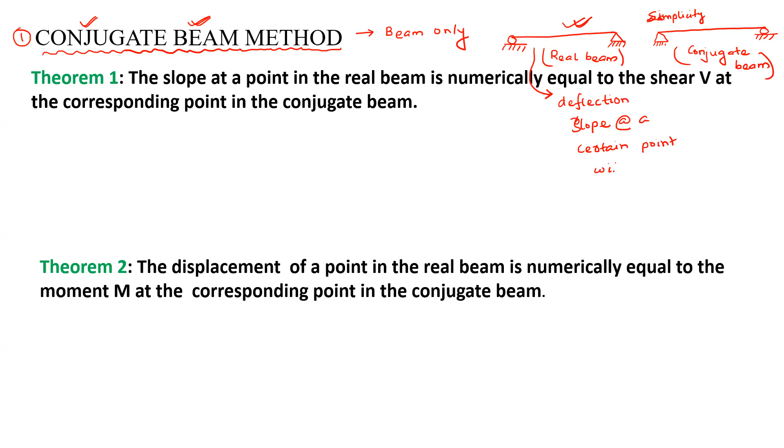Now, in this method, the main question will be like this: we need to find either deflection or rotation, which is also called slope, at a certain point within the span.

So we will make a conjugate beam. There, this slope and deflection can be correlated with some other parameters which are called kinematic parameters. When you find all these parameters, this indirectly will give the deflection and slope for the real beam.

So for this, we have two theorems: one to determine slope, and another to determine deflection. The first theorem states that the slope at a point in the real beam is numerically equal to the shear force at the corresponding point in the conjugate beam.

Like we know dV by dx equals W. We also know d theta by dx equals M by EI. So when you integrate once, it gives shear force equal to the integration of W dx, and theta is given by the integration of M by EI dx.

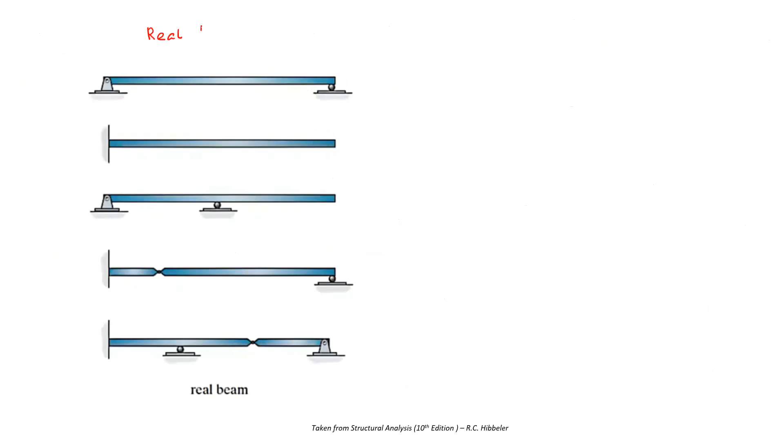Now, these are some of the real beams. Now let us draw the conjugate part of those beams.

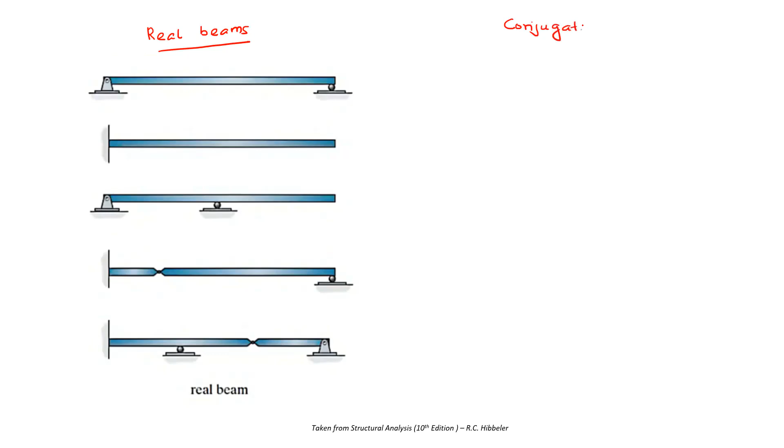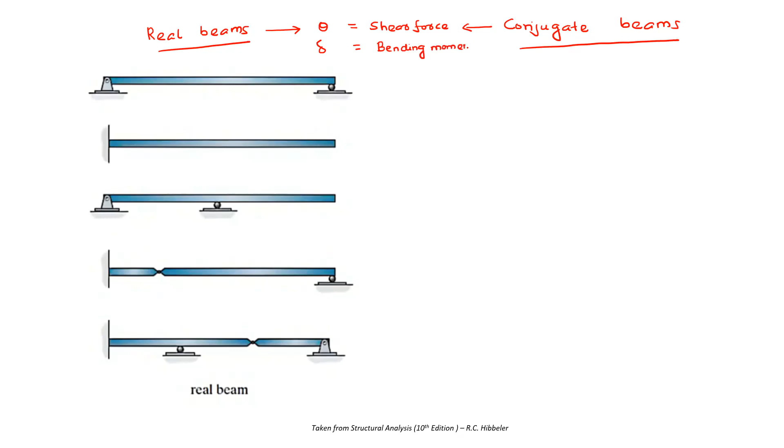Now, in the previous slide, we got that slope and deflection of the real beam will be equal to the shear force and bending moment of the conjugate beam.

So these are all real beams. Now, when this is a hinge support, what will be theta and what will be delta?

Here delta will be equal to 0, and theta we don't know the value, but it won't be 0, because when loads are applied, if the loads are applied downward only, I am assuming, the deflected shape will be like this. This point is neither moving in the horizontal direction nor in the vertical direction, and that's the property of a hinge.

But here you will find there is some slope, so theta is not equal to 0, but displacement or deflection at this point, delta, equals 0. Similarly, for a roller also theta won't be equal to 0, as you can see here. There is some slope, and delta equals 0 because there won't be any translation.

Now, when we draw the conjugate beam, we have stated that theta of the real beam will be equal to the shear force of the conjugate beam at that point.

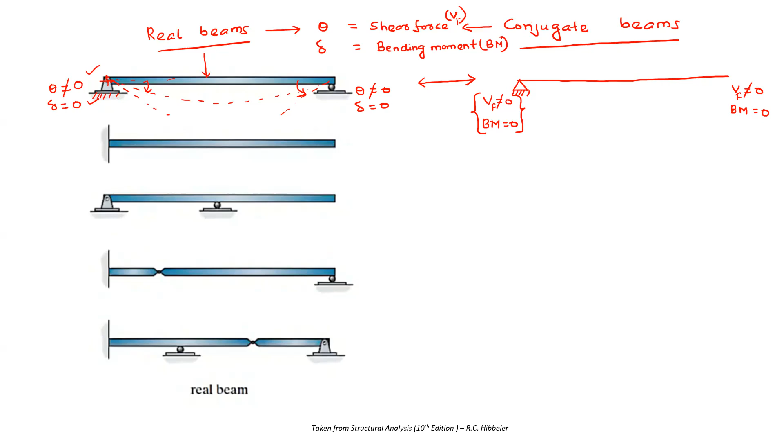But at a hinge, will it carry any bending moment, or is it free to rotate? It is obviously free to rotate, so bending moment will be 0. So from these two conditions, they are satisfied when we consider it a hinge.

Now come to this part. The same two conditions need to be fulfilled, and this can be done with either a hinge or a roller.

Now come to this cantilever beam. Now see here, theta will be equal to 0, because when loads are coming, the deflected shape will be something like this.

So theta is also 0, delta is also 0. But here, when you see, there will be some slope, so here theta won't be 0, delta won't be 0.

So for this, we have to determine supports at these two conditions such that here shear force becomes 0 and bending moment becomes 0, and here shear force and bending moment should not be equal to 0.

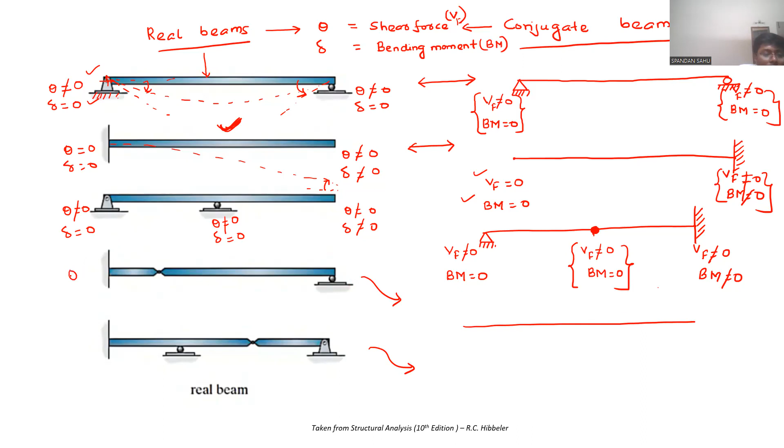Let us first draw for fourth and then fifth. Fourth, here now see, here theta will be 0, delta will be 0. So you can make it free. Here it is internal hinge, so you can make it as roller, which is internal roller. Here it is roller only, so let it be roller. So this is the conjugate beam for this structure.

Now come to this last one. Fixed will become free, and internal roller will become internal hinge, and internal hinge will become internal roller, and this hinge will remain as it is. So is this clear to all of you?

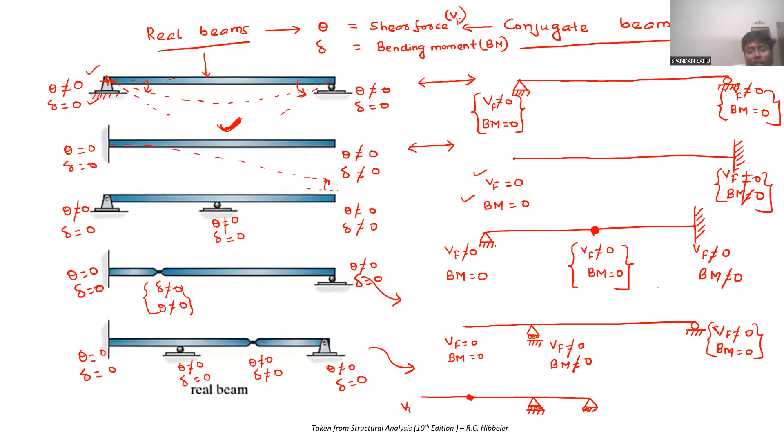Come to this, let us check the consistency. Here shear force and bending moment, 0 sir. So are they consistent now from here and here? Yes, sir. Come to this point. What about shear force and bending moment? Tell me quickly. Shear force is not equal to 0, bending moment equal to 0. Here, shear force is not equal to 0, bending moment equal to 0. How come it become equal to 0? Not equal to 0, sir.

Internal, it is internal roller. Internal, yeah. Now here, shear force is not equal to 0, bending moment equal to 0. Yeah, now check the consistency. Are they matching? Yes, sir. Matching, yeah. So I am proceeding further.

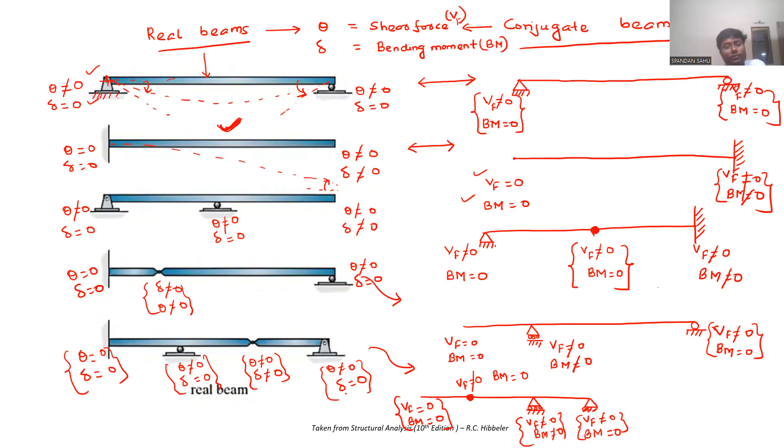Now let us solve this problem. Here they are asking to determine the deflection at point B. Point B is this internal hinge, shown below, using conjugate beam method. EI is given as constant throughout.

So for this beam, let us first draw the conjugate beam. I am drawing it first. You will tell if I have done it correctly or not. Say if it is correct or not. Correct, sir. This is the conjugate beam I have drawn.

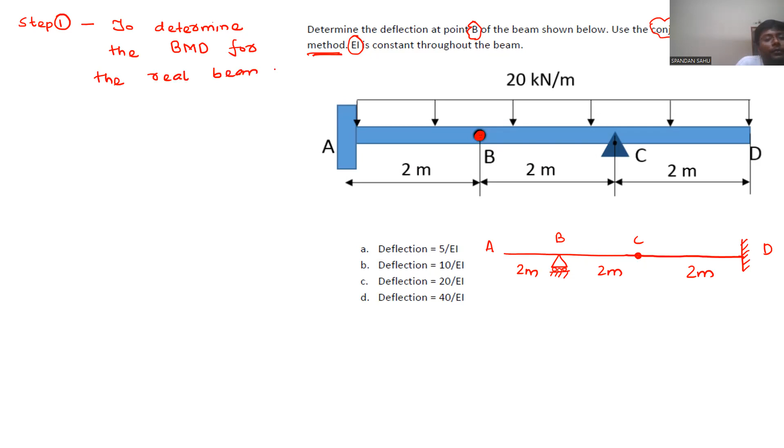Now, the first step is to determine the bending moment diagram for the real beam under given loading condition.

Now, when we will draw the FBD of this complete structure, this is a fixed support, so AY, the vertical reaction will come and with a moment. Let the moment be MA. This is internal hinge, so here bending moment will be equal to 0. Here this is a roller, so we will get one reaction vertical, that is Cy. Now let us apply the equations of static equilibrium.

I am dividing this beam into two parts from this internal hinge. So now I am considering the right part. Here this is Cy. Loading is there throughout the span, that is 20 kilonewton per meter, over 2 meter and 2 meter. What else? Here this is B, this is D. 2 meter, 2 meter done.

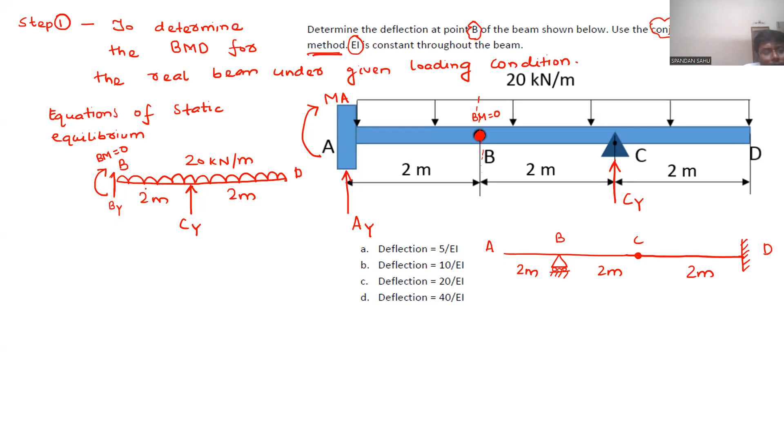When we take summation of moment about point B equal to 0 from the right hand side, taking clockwise as positive: minus Cy into 2 plus 20 into 4 into 4 by 2 will be equal to 0. So from here Cy will be 160 by 2, or directly 80 kilonewton. So Cy we got as 80 kilonewton.

Now for the entire structure, we can write summation of force along y direction equal to 0, considering vertically upward as positive. So we get Ay plus Cy equal to 20 into the total span length, that is 6 meter. Putting Cy as 80, we get 120. So Ay will be 120 minus 80, which is 40 kilonewton, that too in upward direction.

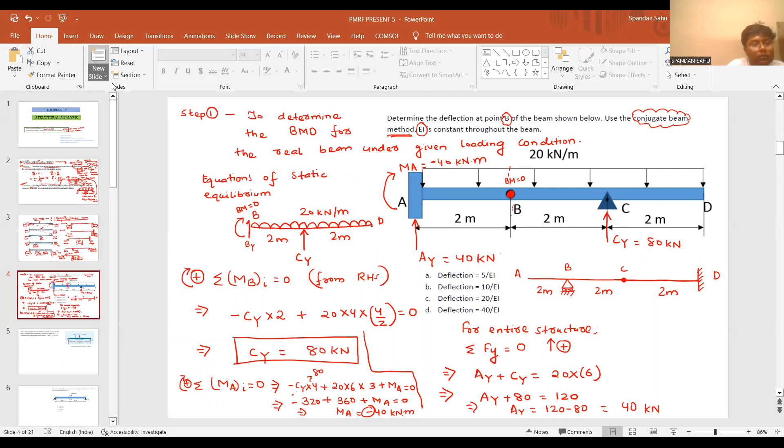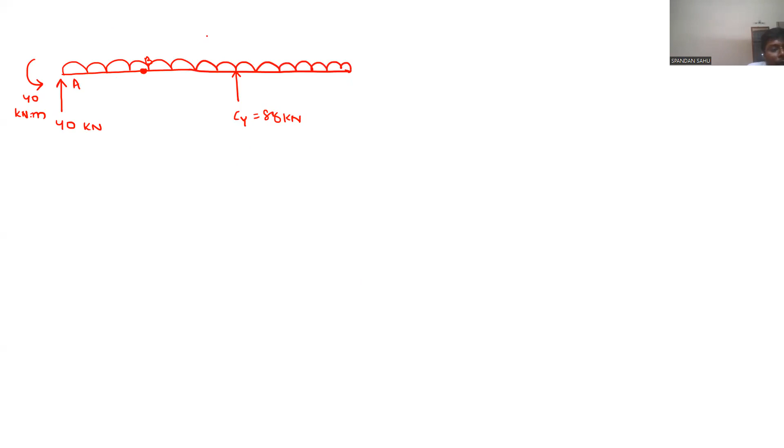Now let us show all the reaction forces. This is 40, here at point A, this is 40 kilonewton meter. This is point B, this is Cy as 80 kilonewton, and throughout the beam we have 20 kilonewton per meter.

So let us draw the bending moment diagram. Now let us take a section here and cut it out. Let this section be MXX, shown from the left side, at a distance of X from the left support.

So we have 40 kilonewton here. This section is cut out. This will be 40 kilonewton meter, and this is the UDL of 20 kilonewton per meter at a distance of X. So the bending moment here will be shown as MXX, and for shear force, which direction will be taken such that our positive notion holds—upward or downward? Downwards. So VXX.

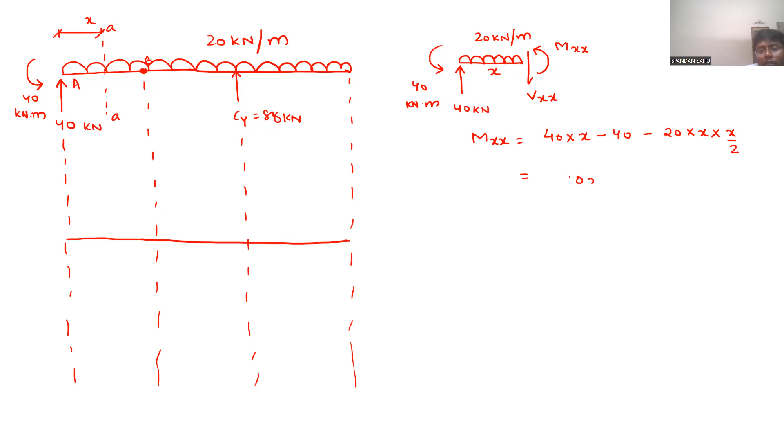Now let us directly write MXX because we don't need VXX now. So MXX will be equal to 40 into X minus 40 minus 20 into X by 2, that is 40X minus 40 minus 20x square by 2. Rearranging, it becomes minus 10x square plus 40x minus 40. So this is a 2-degree parabola equation.

So here at x equal to 0, we get MXX equal to minus 40. At x equal to 2 meter — this is 2 meter, this is 2 meter, this is 2 meter — so at x equal to 2 meter, we get MXX as 0. And it is obvious there is a bending release, so bending moment at point B should be 0.

Now there are two possibilities. Either the bending moment diagram will be like this, or it will be like this. So which one is correct? This is one, this is two. Is one correct or is two correct? Speak out.

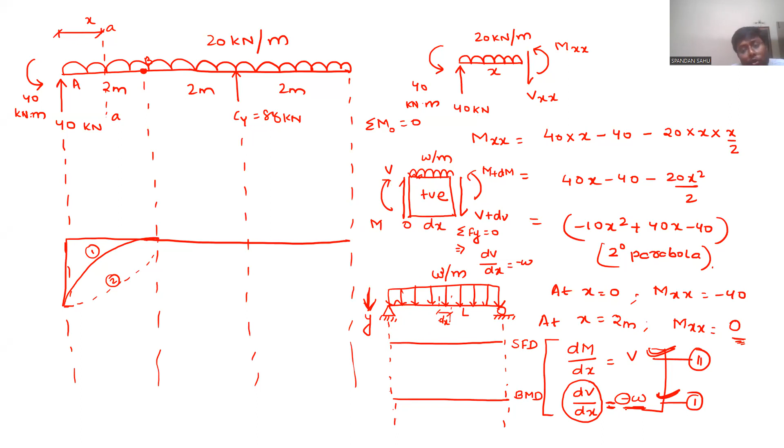So here, when you come, it is minus W here. Minus means it is acting in the negative y direction, downward. And here the load is constant throughout the span. Suppose the span length be L. So you can tell the shear force, the slope of the shear force diagram will be negative, as well as it will be constant because the loading diagram is also constant from this equation.

So how will the shear force diagram look like? Can you tell now? Straight line. Straight line, how? Will it be like this? Yes sir, yeah. Now tell the slope of this line, is it positive or negative? Negative sir. Negative. And what did you get here?

When W is acting downward, the magnitude of W is constant throughout and it is negative. So what will the slope of the shear force diagram be? It should suggest that the slope of the shear force diagram should be negative and the slope should be constant throughout. So at any point when you see, the slope is constant. Is it so? Sir.

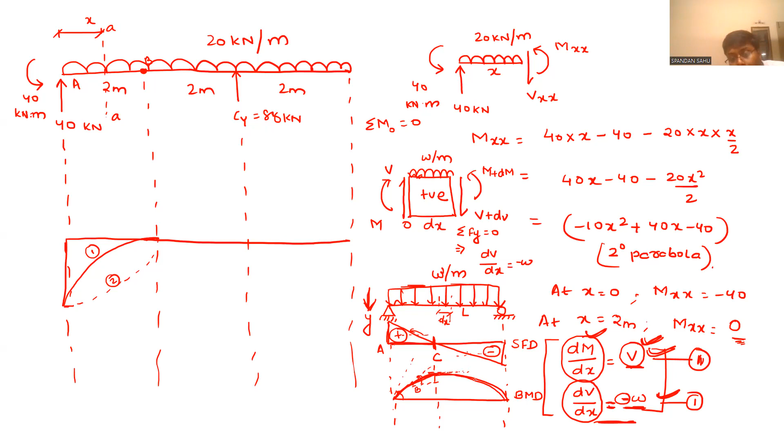Now we will get like this, right? Yes, sir. So when you draw a tangent here, slope will be 0, increasing. The slope is increasing as the value of the shear force diagram is increasing, but the slope is negative. The slope is negative, magnitude is increasing. So you got it from these two equations, how we are correlating the SFD and BMD from the loading diagram directly.

Now I will show you for this case. Now you can only say which one is correct. Here the load is acting downward and the slope of the load is constant, meaning the magnitude of the load is constant. Magnitude of the load being constant means the slope of the shear force diagram will be constant. Correct? Yes, sir. And negative means the slope will be negative.

Till this point it is correct? It's correct. Got it? Now, what we got, our shear force diagram: the slope will be like, suppose let us draw here for this section only, because throughout the section we have to take part by part and draw. So I am just showing this part. Here it will come like this. Till this section I am showing.

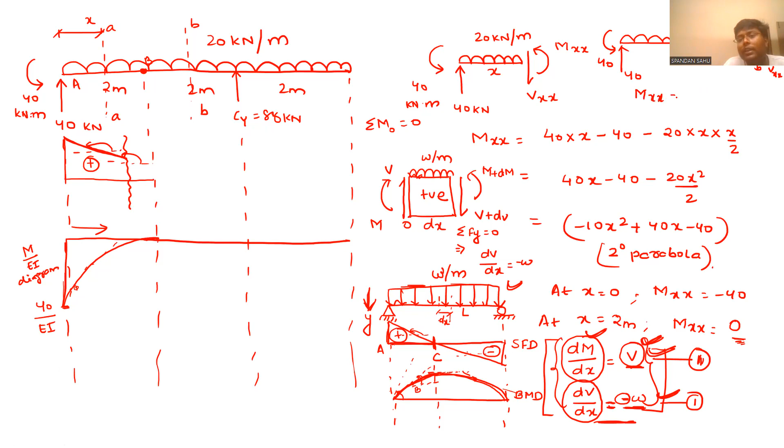Now, when you take a section here, let's say BB. It will be something like this. This is B. This is 40, this is 40. This will be MXX, and this is BB, and here VXX. Now, VXX we are not interested in finding. We need to determine MXX at that section. It will be the same, correct? Yes, sir. So I am directly writing this: minus 10x squared plus 40x minus 40.

So here put x equal to 2 meters, you will get 0, and x equal to 4 meters, you will get... what will be this magnitude? 40 by EI, correct? The 40 by EI.

Now for this section, from where should I take the x? From left support or right support? Right support. Yeah, it will be easy if we take it from the right support. Now for this part, I am drawing it here only. This is x. This will be Vxx, and here it will be Mxx.

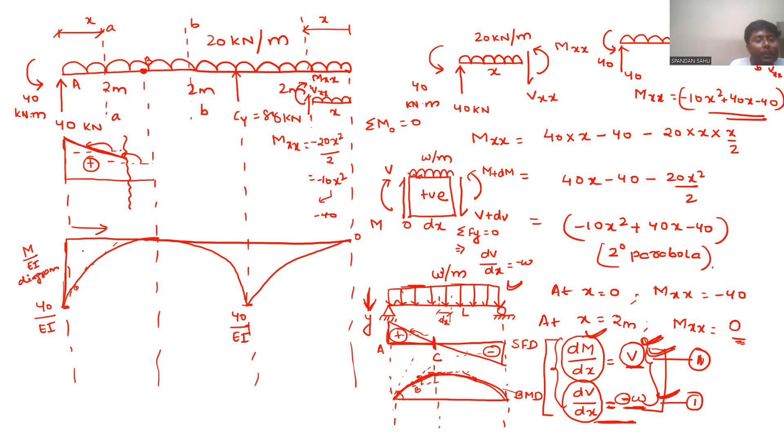Now tell me the Mxx equation here. It will be minus 20x squared by 2, equals minus 10x squared. Correct? Yes, sir. So when you put 0, it will be 0 here, and when you put 2, it will be minus 40. This is also negative. Now this is the M by EI diagram.

This M by EI diagram, we will take and put it in this conjugate beam. So let us do it.

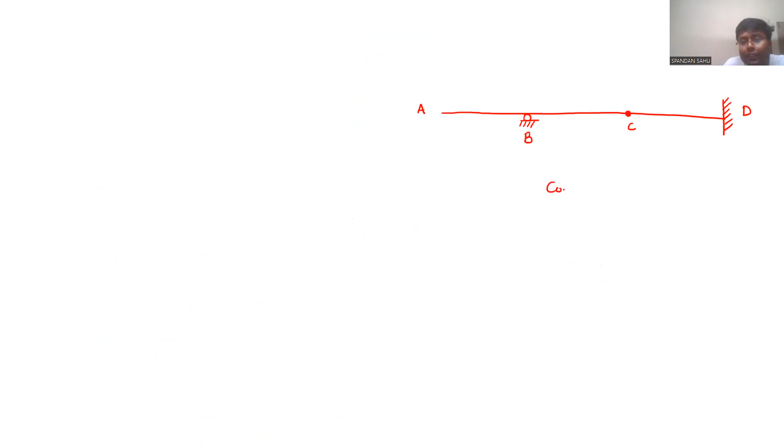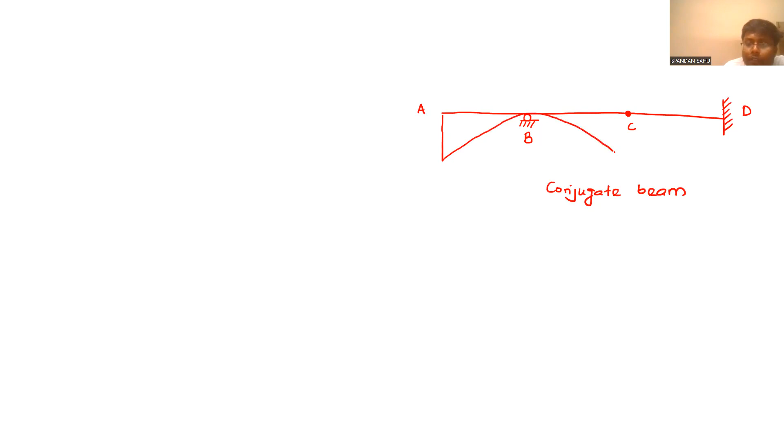So here we will have a roller. Just tell me if I am doing something wrong, because I am unable to see the previous figure. It was our correct conjugate beam, right? Yes, sir. Now let us put it like this.

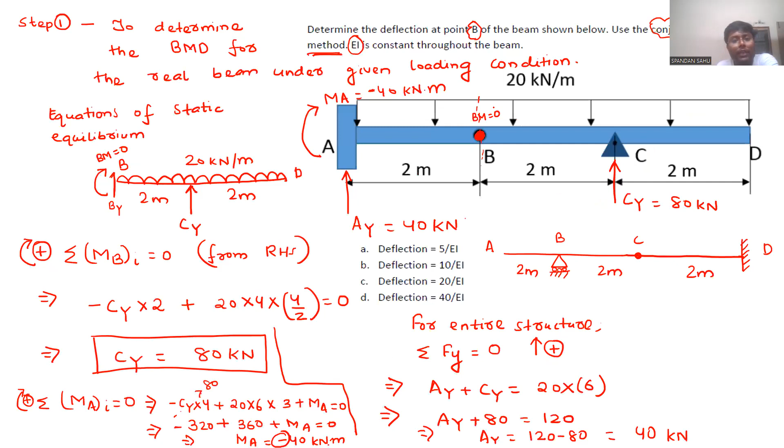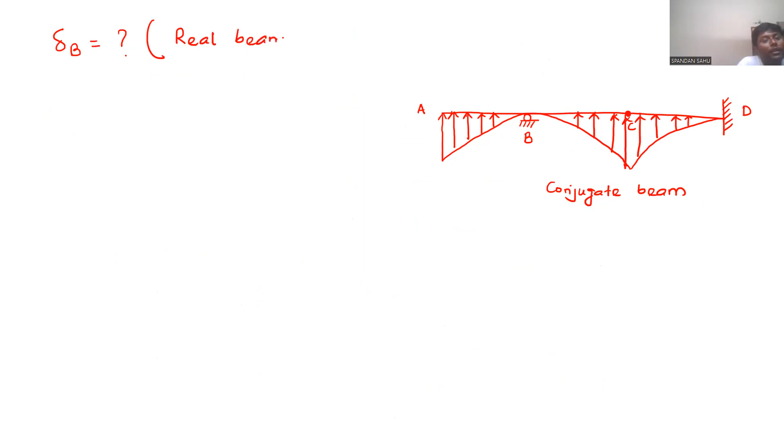Now this M by EI diagram will be the loading diagram for our conjugate beam. Now what do we need to determine? Deflection at point B. So delta B we need to determine for the real beam. So what component do we need to calculate for this conjugate beam? Bending moment at B. So how do we determine bending moment at B?

Area of the loading into 2/3 L. And 3/4... how the bending moment diagram, sorry, the loading diagram, the M by EI diagram is, something like this. This is A, this is B. Correct? Yes, sir. And this is a 2-degree parabola.

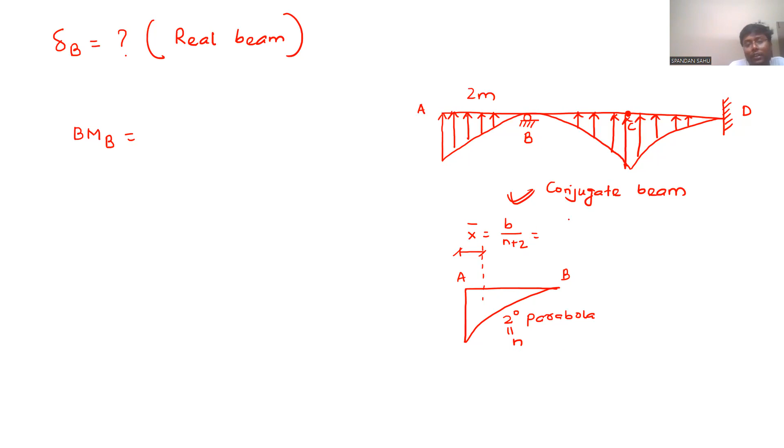So our N is 2. Yes, sir. Previous class we discussed this, right? Yes, sir. If this is X bar, what is our formula? B upon N plus 2. Correct? Where B is this 2 meters, meaning this width. So now it will be 2 by (2 plus 2), equal to 2 by 4, that means 1 by 2. Correct? Yes, sir. So this part will be how much? 2 minus 1 by 2, which is 3 by 2.

Now tell me about the area. What was the formula? B, H by N plus 1. So what is B? It's 2 meters. H is 40 by EI, and N is 2. So what is this value? It's 2 by 3 into 40, which is 80 by 3.

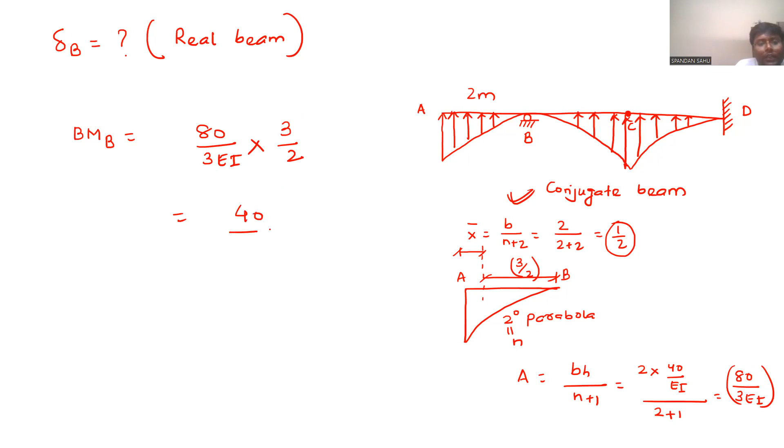Now we can directly write area into lever arm will be the bending moment. So directly write 80 by 3 into what is the lever arm, 1 by 2 or 3 by 2? 3 by 2. So we are getting 40 by EI. Let us check if the options are matching or not. Which option? D? Yes, sir.

So is this problem clear to everyone? Yes, sir.

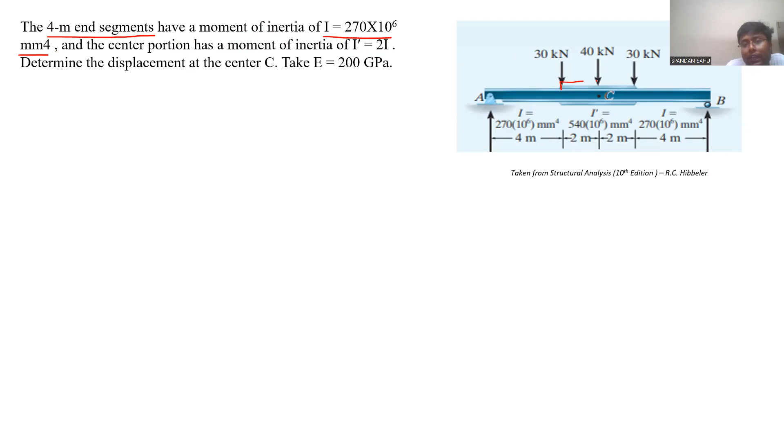Now let us come to this problem. Let us read the problem. If the 4 meter end segments have a moment of inertia I equal to 270 into 10 power 6 mm power 4, and the center portion has a moment of inertia double that, 2I, meaning this portion is slightly thicker compared to the two side portions. The value of I is 270 into 10 power 6 mm power 4.

Now we need to determine the displacement at this midsection C, and it has been given that the modulus of elasticity is 200 GPa. So we will do it using the conjugate beam method.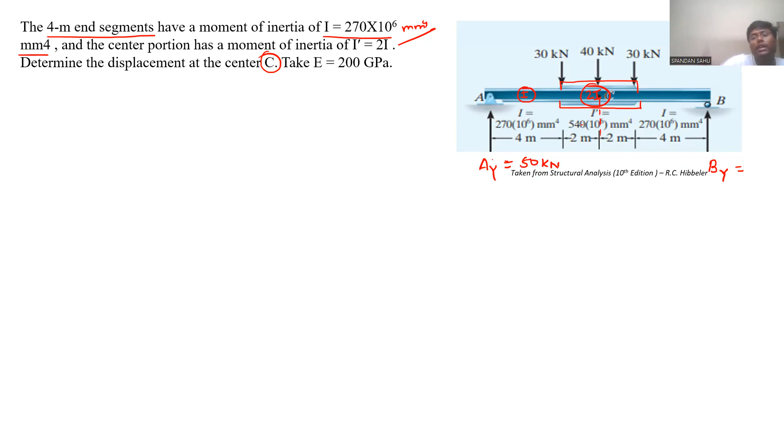So first, tell me if the beam is symmetric or not, structure-wise and loading-wise, both. Both are symmetric, sir. Yeah. Then if this is AY and this is BY, tell me the reactions directly. 50 kilonewton, sir. Yeah, 50 kilonewton, because the total vertical load is 100 kilonewton, so 50-50 will be divided to each of the joints.

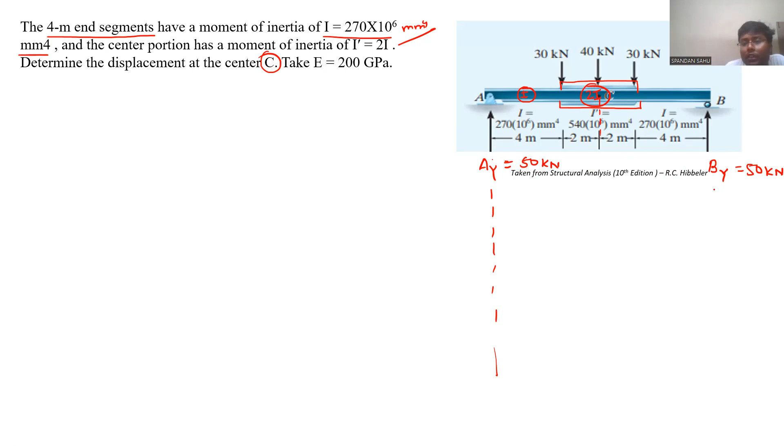Now we can directly draw a bending moment diagram now. Yes, sir. So first we will draw the bending moment diagram here, next we will draw the M by EI diagram here.

Now let us cut a section here. Let this be AA. So here, if you write MXX, it will be 50x, correct? Yes, sir. And that 50x equation is valid for x in between 0 to... tell me, what will be the upper limit? 4 meters. Yeah.

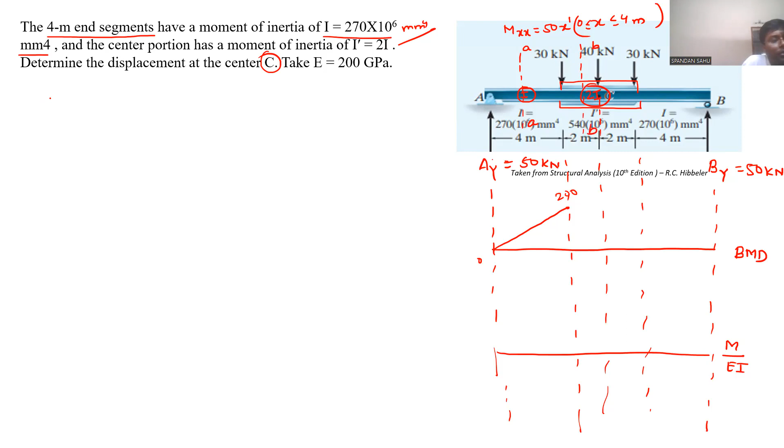So at x equal to 0, it will be 0. At x equal to 4 meter, it will be 200. And it is linear because degree 1. So this is 200. Now, when we are taking the section here, BB, I am writing it here because otherwise we will do mistake.

This is 50 kilonewton till here. This is 30 kilonewton, and from here this is x, and here we are writing this is section BB, and we are interested in determining MXX.

So here MXX will be 50 into x minus 30 into, this was 4 meter, x minus 4. You got this equation, how it came? Now upon simplifying, it will be 20x plus 120.

So right, at x equal to 4 meter, what is the value? At x equal to 6 meter, what is the value? Equal to 200, sir. 200, 240. So here something 240 will come.

Now the beam is symmetric. The loading is also symmetric. Shear force will be anti-symmetric. Bending moment diagram will again be symmetric. So can we directly draw a symmetric bending moment diagram about this line? Yes, from the center line.

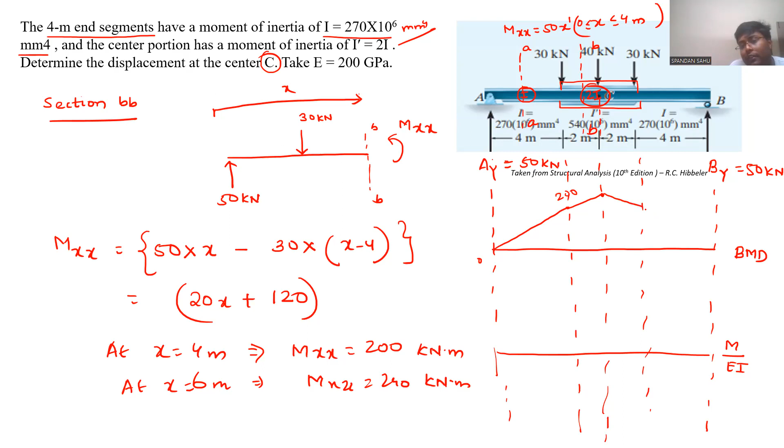So this is 200, this is also 200, 0, 0, 240. Now divide it by EI. That is normalizing the bending moment with respect to flexural rigidity. So how it will look like? I am drawing, tell me if it is correct or not. Is it correct? Yes, sir.

This is M by EI diagram. Now see the real beam. Real beam is simply supported. Correct? Yes, sir. So for simply supported beam, what will be its conjugate beam? Same, sir. Simply support. Same.

Let me add slides. Now our beam is like this. Here it will be roller. Here it will be hinge. This is our conjugate beam.

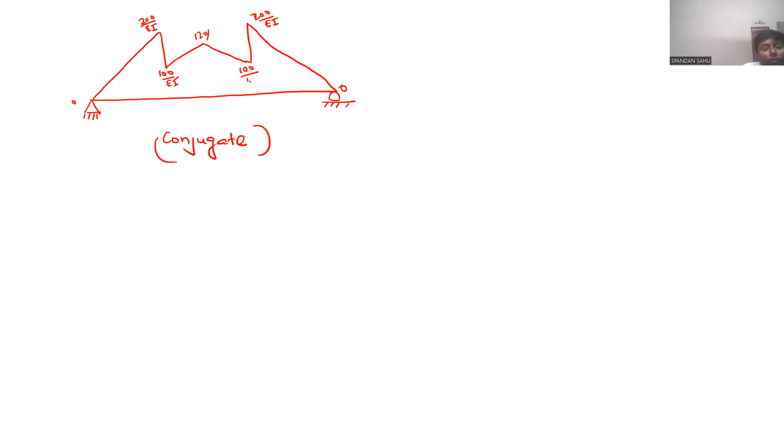Now I am just imposing that load in this conjugate beam.

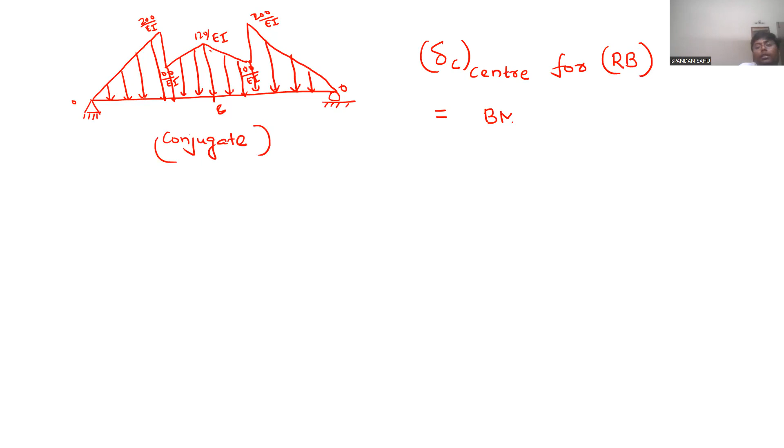Now we need to determine the displacement at the center. Center means this is center C of the beam. Now delta C at center for real beam, I am writing RB for real beam, will be equal to what? Bending moment at C for conjugate beam. Correct?

Now we can directly do. For this, we need to determine the support reaction. This is point A. This is A and B.

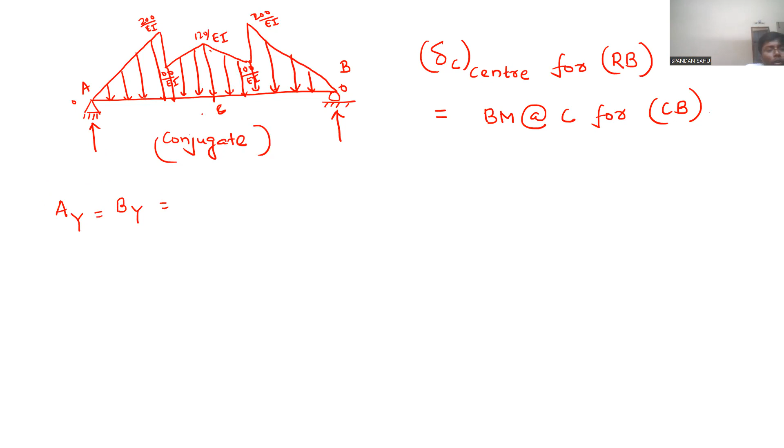And you can directly do one thing. The complete M by EI diagram also is symmetric, and the beam is also symmetric structure wise and loading wise also. So we can directly write AY will be equal to BY will be equal to total load, means area under this M by EI diagram, whole into 0.5.

So let us determine the area one by one. Let this triangle be first one, this trapezium is second one, and this trapezium be third one, and this trapezium be fourth one. Now, if we will calculate the area of first and second and multiply it with 2, we will get the area of the total M by EI diagram.

So I am doing area of 1 plus area of 2, then multiplying it by 2 such that we will get total area, then multiplying it by half. Then 2 and half are done, they will cancel out each other. So this area of 1 and area of 2 will directly provide the value of the support reactions.

Now let us calculate area of 1. It will be half into length was 4 meter, height is 200 by EI, plus area of 2. Trapezium area is half into sum of parallel sides, that will be 120 plus 100 by EI, into the length will be 2 meter. Till now it is correct? Yes, sir.

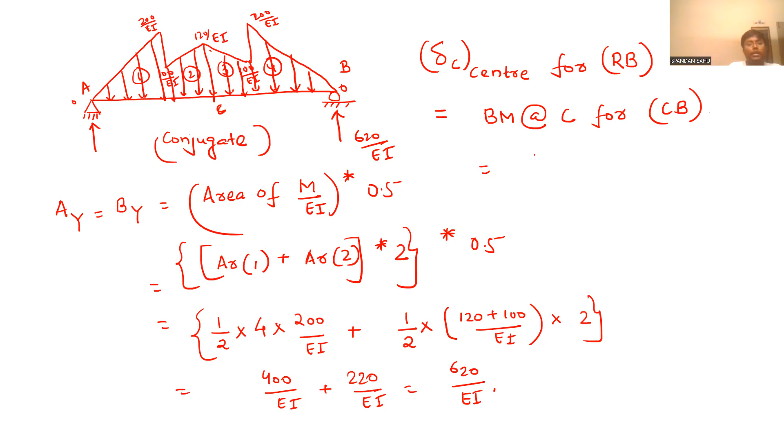So we got these reactions as 620 by EI. So we can directly do now. It will be AY into the lever arm. What will be the lever arm? 6.

Then the major chunk will come again. We have to calculate the centroids for each and every shapes. Now for one, it is triangular. So we can directly write half into 200 by EI into 4 into, it will be 2 plus 1/3 of 4, minus, I am dividing this trapezium into a rectangle down and the triangle up. So for triangle, it will be half.

This is 100, this is 120. So this height is 20 by EI. And the length is, this length is 2 meter. And that will be 1/3 of 2, minus the rectangle. Rectangle is nothing but 100 by EI into 2 will be the area, and 2 by 2, 1 will be the lever.

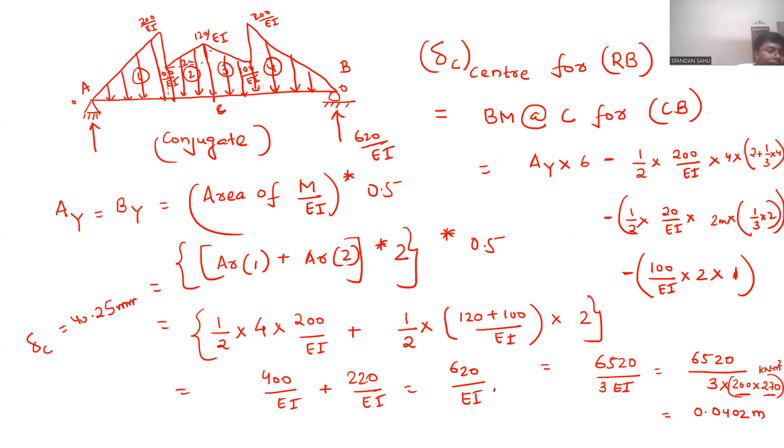So is this problem clear to everyone? Yes, sir.

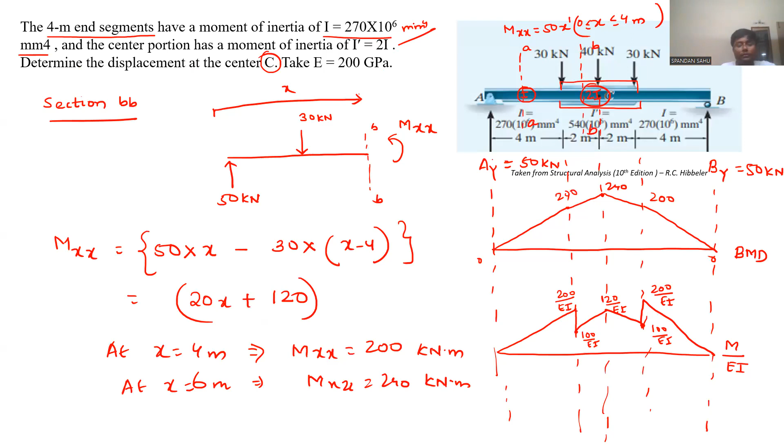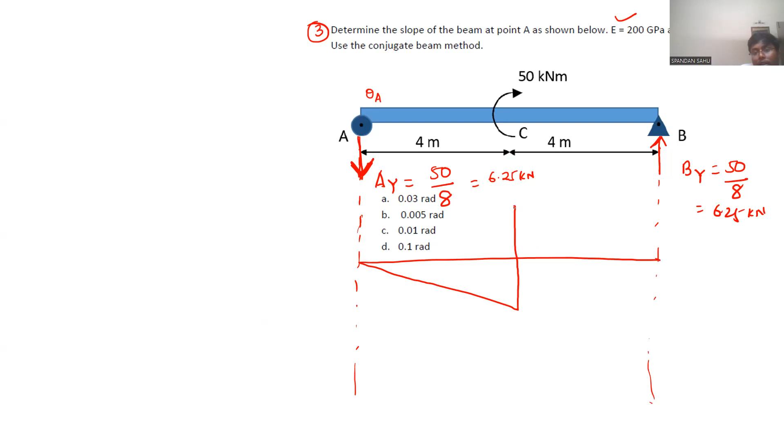And if all the ordinates are divided by EI, or normalized with flexural rigidity, we will get the M by EI diagram.

And this M by EI diagram, this is a simply supported beam, so its conjugate counterpart will also be a simply supported beam like this. So I have drawn it here only. And this M by EI diagram will look like this, and this will be the loading diagram for this conjugate beam.

This will be 6.25 into 4 is 25, and normalized by EI will be 25 by EI, and this will be also 25 by EI.

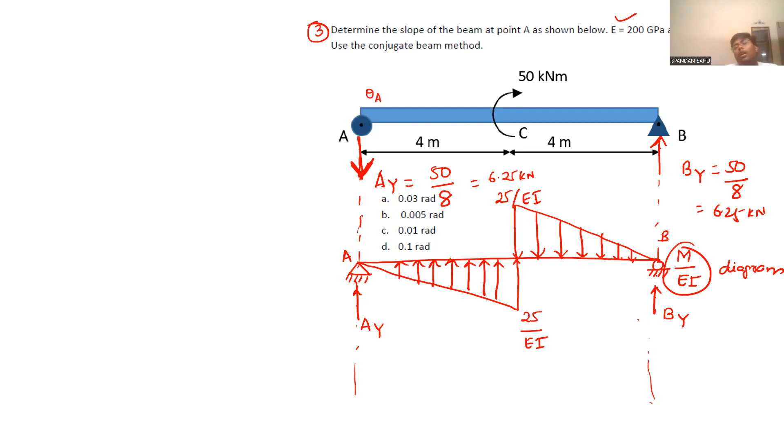Now here we need to calculate the reaction forces again. We have to calculate this, because we need to determine the slope at point A.

So slope, that is theta A for real beam, theta A for real beam will be equal to AY. Is it so or not? AY, let us give it another name, AY prime, otherwise this AY and this AY you will get confused. Is the statement correct? Yes, sir.

Now let us determine AY prime directly. Now do summation of moment about point B prime, this is A prime, this is B prime, of I equal to 0. Let us take clockwise to be positive. So here it will be AY prime into 8.

Plus half into 25 by EI into 4, into what will be the lever arm? 4 plus 4 by 3. Then it will be minus half into 25 by EI into 4, into what will be the lever arm here? 2/3 of 4. And that should be equal to 0.

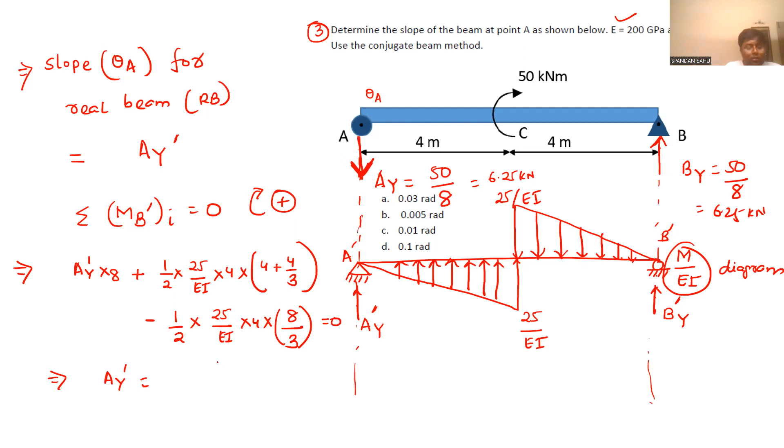This will be 800 by 3EI, and whole will be divided by 8. 400 by 3 minus 800, divided by 8. So it will be minus 50 upon 3EI.

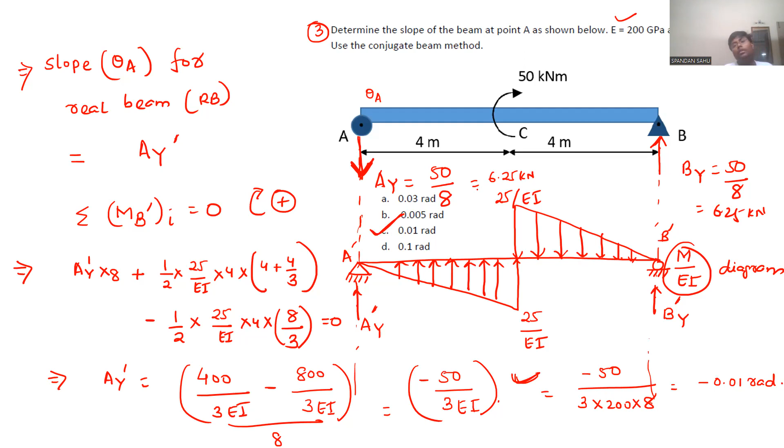So we got slope as minus 50 upon 3EI. So let us put the value of EI as 200 into 8. I am getting minus 0.01 radian. So option C. So you got this question, right? Yes, sir.

Now the same problem here, they are asking to determine the maximum displacement. So for the same problem we can just draw the M by EI diagram, or the conjugate beam, directly.

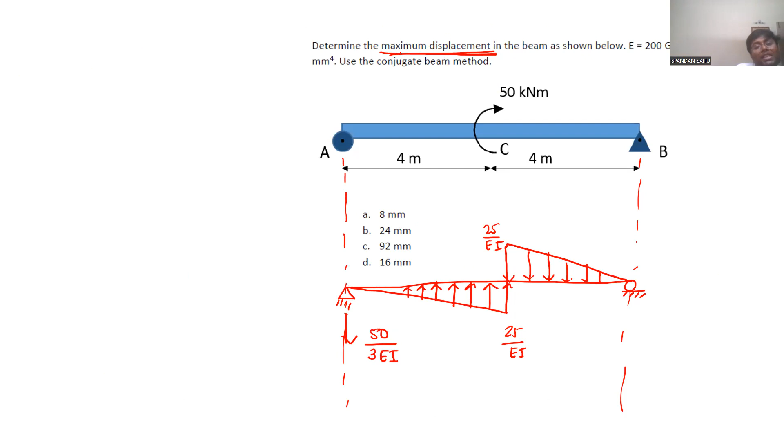This was 50 upon 3EI in the downward direction. Now we need to determine the maximum displacement. So maximum displacement for the real beam

will be equal to maximum bending moment for the conjugate.

So here we don't know where the maximum bending moment will occur. As from mathematics we know the concept of maxima. Suppose we need to find M max, we can do a first derivative and make it equal to 0 to get the null points or the roots actually.

So dM by dx is what? Shear force, right? So we can directly write shear force equal to 0. Let this be section AA where we have to write the shear force.

We can directly write minus 50 upon 3EI plus half into 25 by 4EI into x, into this distance is x. Half into 25 by 4 per meter into x will be, that should be equal to 0.

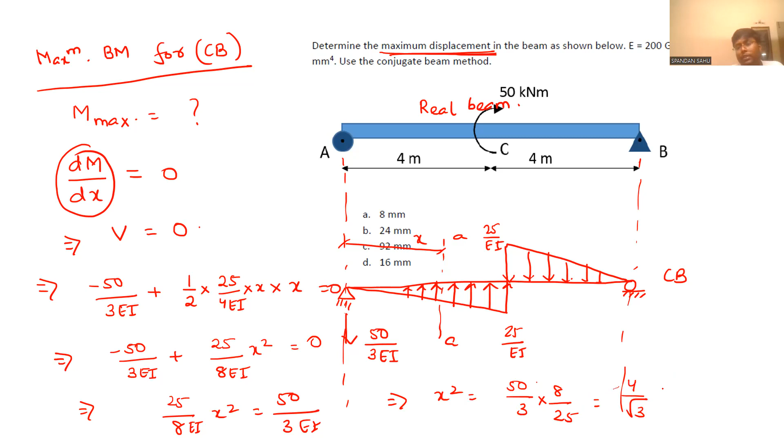So 1, 2... four by root 3. This is coming out to be 4 by root 3, right? Yes sir, means this squared. So x is coming out to be 4 by root 3 meter.

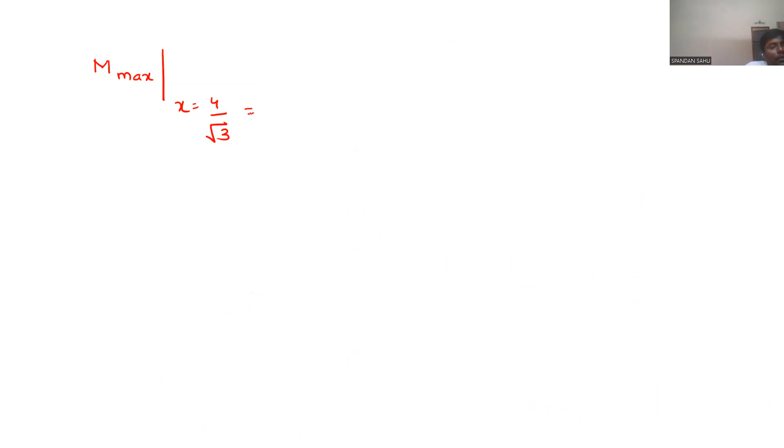Now you just write bending moment M max at x equal to 4 by root 3. And when you will write the equation, it will be minus 50 by 3EI into x plus half into 25 by 4EI into x, into x, into x by 3.

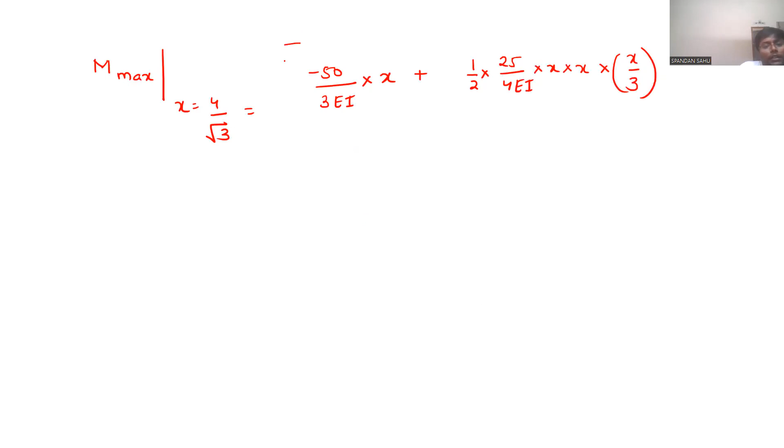Correct? Yeah. Just see the equation, if it is correct or not. Sir, correct sir. Yeah, then just substitute x as 4 by root 3 everywhere.

So what will be the value? Let me check if... I don't have the value, let me calculate. We are getting minus 25.66 by EI.

So minus 25.66 upon EI, 200 into 8... minus 0.016 meter, 16 mm. So option D.

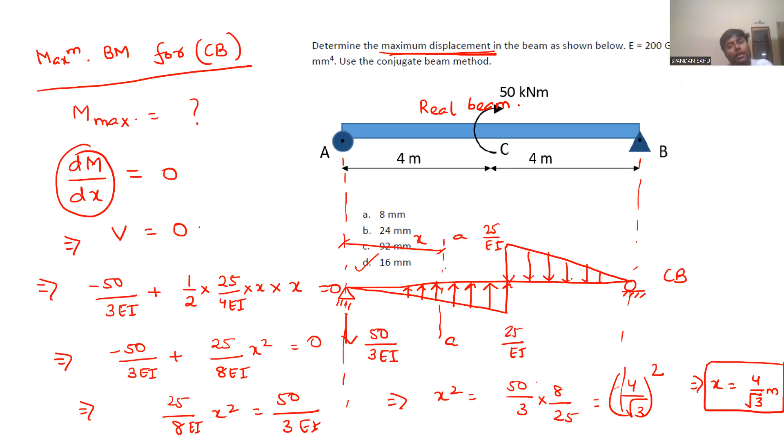Got it? Yes sir, is it clear? Clear sir, yeah. So let us move to the next question. Yeah.

You people just tell me how to do this question. In this question, we need to draw the conjugate beam only.

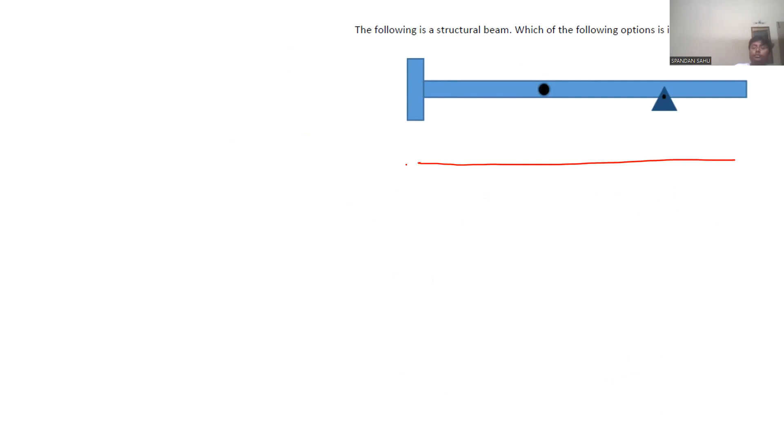So this is a fixed end, so here which support will come? Free end, free, this is internal hinge. So it will be? Internal roller. Yeah, and this is? Hinge.

What it will become? Internal hinge. Yeah, and this is a free end, it will be? Fixed. Yeah, so this will be the conjugate beam.

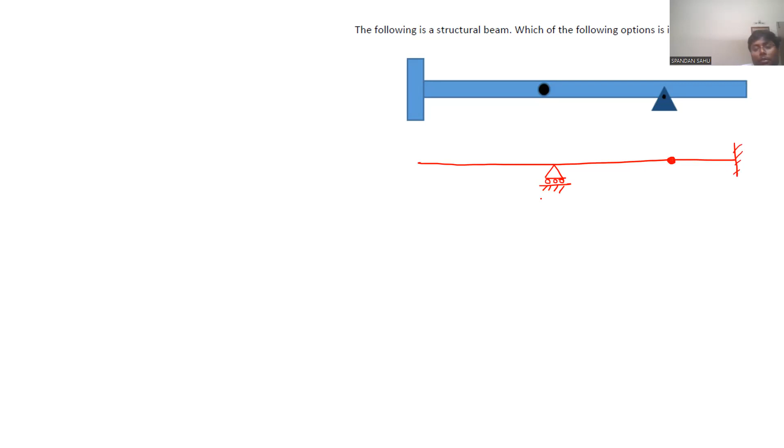No problem in this question, I hope. Yes, sir.

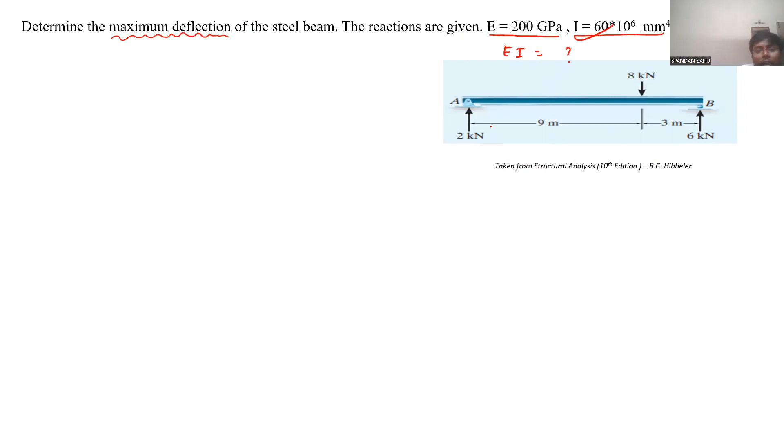So from here you will get EI. Now, the reactions are also given, 2 kilonewton and 6 kilonewton. So we can directly draw the M by EI diagram. Let us draw it and check the beam.

Beam is simply supported, so its conjugate beam also will be simply supported. So I have done its conjugate beam also, and we will directly superimpose the M by EI diagram above this span only. So when you will write Mxx here, it will be 2 into x, and it is valid till 9 meter.

So 2 into 0 is 0, 2 into 9 is 18, so it will be 18 by EI. And from this side, if you will write 6 into 0 is 0 for this point, and 6 into 3 is 18. So BMD will be something like this, or M by EI diagram for generality.

So this will act as the loading or conjugate beam. So we need to determine the maximum deflection. For that, again we need to find the support reaction. Let this be AY, let this be A prime, B prime, AY and BY.

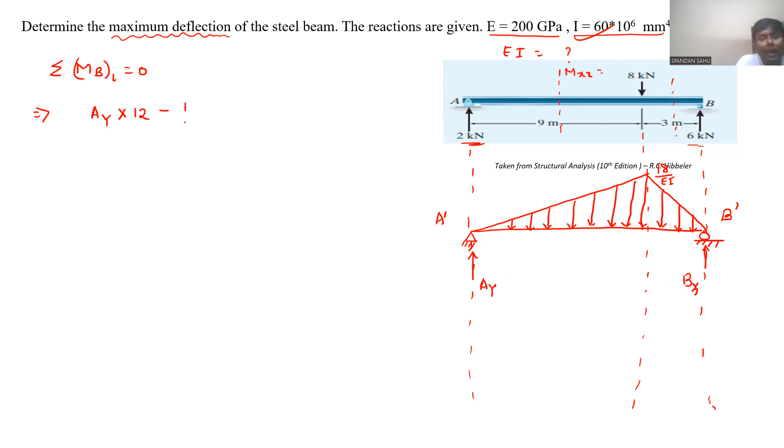Now we can determine summation of moment about point B prime equal to 0. We will do. So you will get AY into 12 minus half into 18 upon EI into 9 into 3 plus 1/3 of 9, then minus half into 18 upon EI into 3 into 2/3 of 3 means 2 meter, and that should be equal to 0.

So AY will be equal to 9 into 9 into 6... 9 into... 540 by 12... 45.

This will be 45 by EI. Next equation, we can write summation of force along Y equal to 0, and vertically it is positive. So we can write AY plus BY minus...

We can directly do half into 18 upon EI, it will be 12 meters, equal to 0. And AY we know is 45 by EI plus BY minus 12, 9... so this we are getting as 63 by EI.

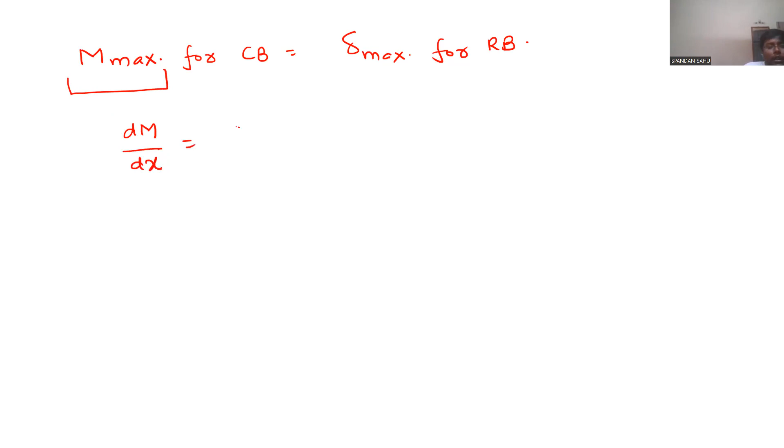Now again for maximum deflection, M max is maximum deflection for conjugate beam. A maximum moment for conjugate beam will be delta max for real beam. So we need to determine M max for conjugate beam, but we don't know at which position it will come. So we can directly differentiate the equation of M with respect to X and make it 0. We'll get the root, so we have to first write MXX.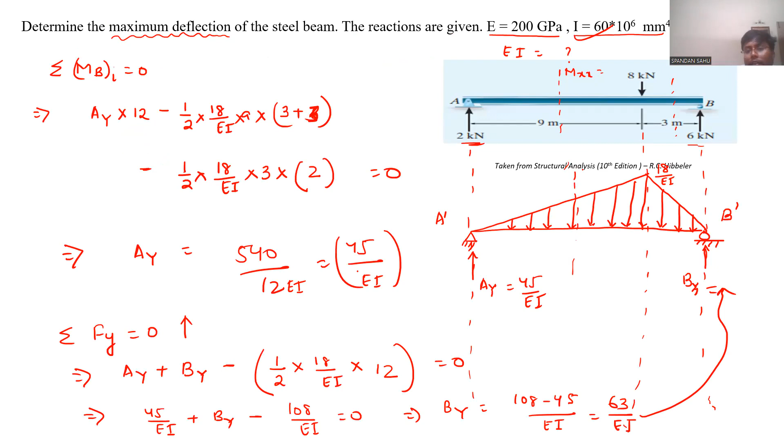Let us take the section here. Let this be MXX prime. Let us do MXX prime here. That will be 45 by EI into X minus half into 18 by 9 EI into X into X into X by 3. Check if this is correct or not. X I am telling is this distance.

So you can simplify: 45x by EI minus, it will be 2 by 2 x cube upon 3 EI. Till now it is okay. So just differentiate this, you will get 45 by EI minus 3x square by 3EI equal to 0. So 3 will get cancelled out, so x square will be 45, so x will be under root 45.

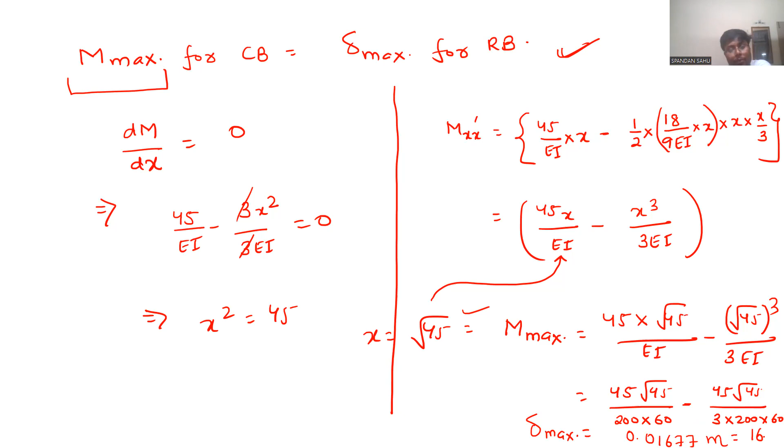0.01677 meter means delta max is 0.01677 meter, or around 16 mm. So you got it? Yes sir. This question is clear, right? Yes sir.

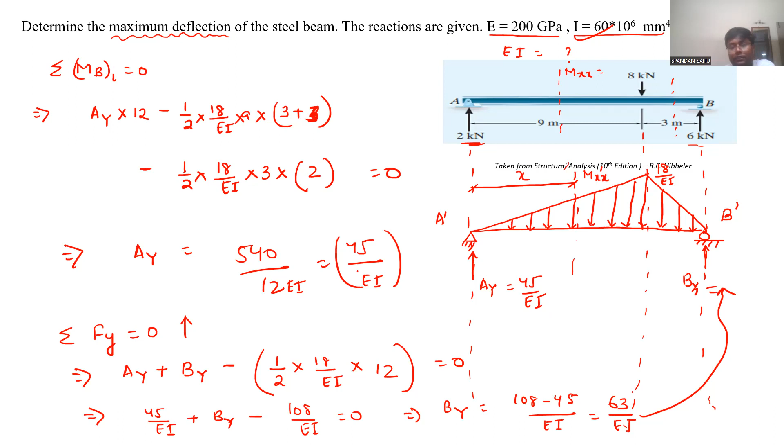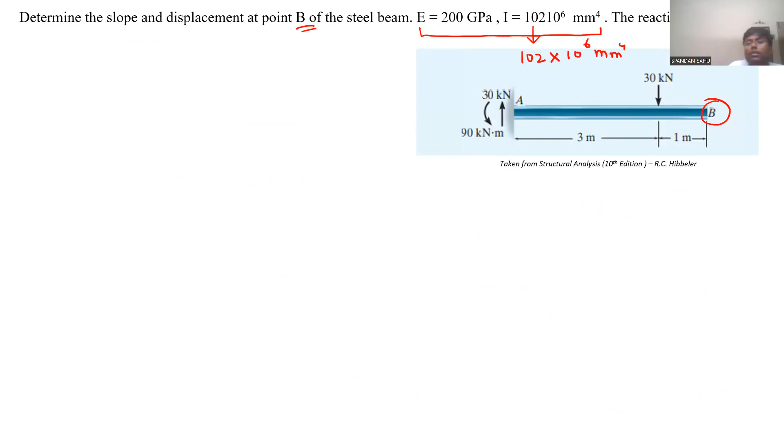Now this is a cantilever beam. We need to determine slope and displacement at this free end B for this steel beam having the following properties. Here I is, there is a mistake, 102 into 10 power 6 mm power 4. And the reactions are given directly: 30 kilonewton and 90 kilonewton meter.

So let us draw. So what is the name of this beam? Cantilever. So the conjugate will be like this. Correct or not? Yes sir. So let us draw now the M by EI diagram directly and superimpose in this conjugate beam as loading.

It will be, let us take sections from this right support or free end, X. So in this 1 meter, 0 to 1 meter, there won't be any bending moment. So we reached till here and there is no bending moment. Now when you take a section here, you will get minus 30 into... let us write it: MXX will be minus 30 into X minus 1. Is it correct? Yes sir.

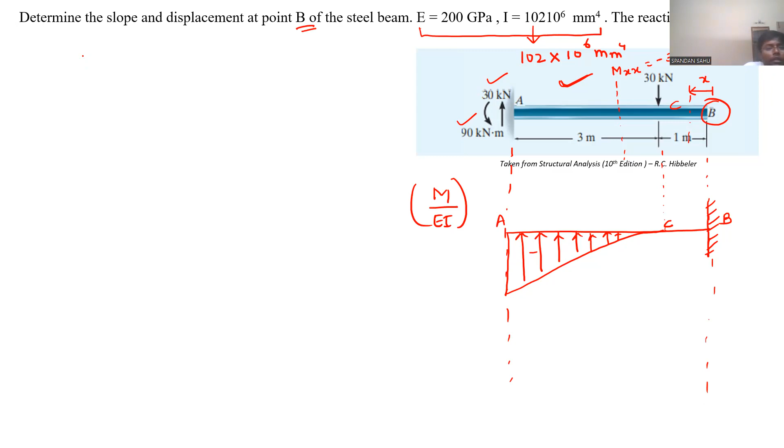This is point A, this is point B, let us name point C. Now we need to determine theta B as well as delta B for the real beam. So theta B real will be equal to what? Shear force at B. So the reaction will be directly the reaction at B.

So the reaction will be directly the area, but in opposite direction. So it is 3 meters, this is 90 by EI. So the area of this M by EI diagram will be 90 by EI by 2 into 3, which gives 270, it will be 135 by EI, and the direction will be downward.

So this will be 135 by EI, which is 135 by E into 200 into 102. So 135 into 200 into 102. I am getting 6.6176 into 10 power minus 3 radian.

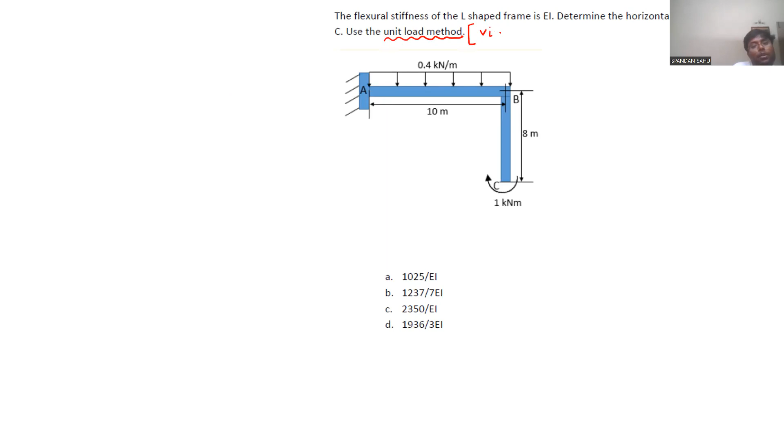So there we were doing for truss member and the joint deflection. There we were getting like 1 into delta. This 1 unit was virtual force, applied at that joint, into the real displacement, and we write it as summation of K. That K force system was coming due to this 1 unit virtual load into PL by AE, which was the displacement of each member. So we get delta directly for truss members as summation of K PL by AE.

There we were doing summation because for truss members, when you draw the axial force diagram, throughout the member the axial force diagram will be the same. So when you do the summation for the entire number of members in the truss system, you get the total displacement for the desired joint, in the direction in which you applied the 1 unit virtual force.

But when we are doing for frames or beams, the bending moment diagram varies from section to section. From one section the bending moment diagram is something, for another section it will be something else. It might be same, but in the generalized case it may change depending upon the external loading condition.

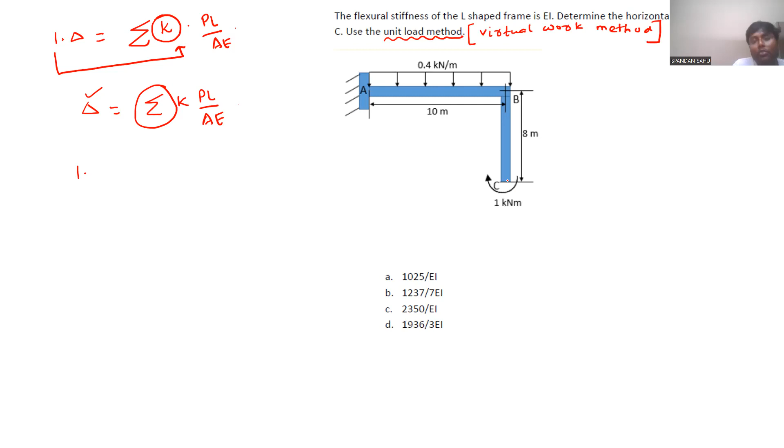So here the external virtual work done will be calculated just like in this case, where they are asking to determine the horizontal displacement at C. So I will give a unit horizontal force, 1 unit. For this 1 unit, the actual displacement at these joints, let that be delta C.

And that will be equal to, this is the external virtual work done, and that should be equal to the internal virtual work done. So when you are applying this 1 unit load, remove all the external loads that are there in the structure and calculate this small m. This small m is due to the unit load - it is the bending moment along the length due to this 1 unit virtual force you are applying at the joint where you need the displacement.

So you write this small m due to this 1 unit virtual force, and this will be d theta, integrated throughout the length of the member. So now d theta can be written as m into M by EI into dx. So 1 into delta C, that is external virtual work done, will be the integration over the entire length of the member of m by EI into dx. You know now how this d theta becomes equal to m by EI into dx. Yes, sir, yeah.

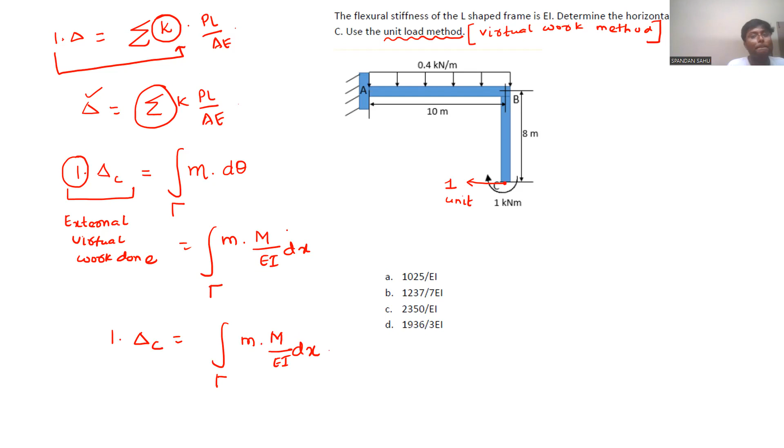So this is the internal virtual work done. So now, this is the concept for this unit load method. Now we will see this question.

Here, the flexural stiffness or rigidity of the L-shaped frame is EI throughout, and the flexural rigidity for this vertical member is also EI. We need to determine the horizontal displacement at joint C. So I am applying this 1 unit.

Let me draw the system once again. This is 1 unit. I am dividing it and drawing the free body diagram for each and every member separately. This is 8 meter, this is C, this is B, this is also B, this is A.

When you apply 1 unit here, is the member BC stable now? Static? It should deflect, sir. It should be static, but due to application of this 1 unit load, is the member BC static or stable? No. So here this 1 unit will be reflected.

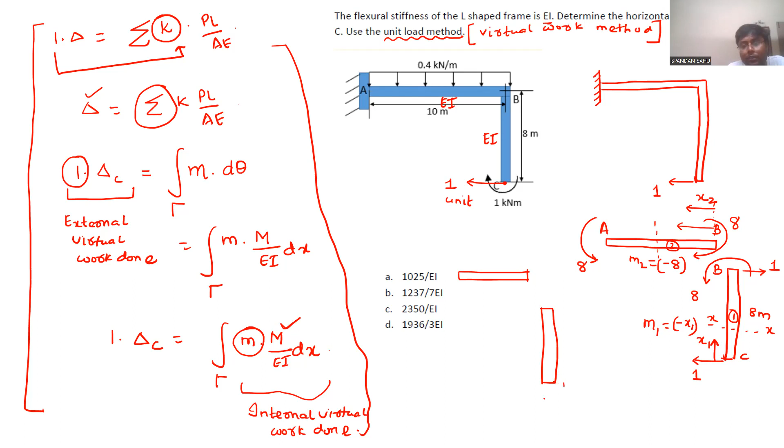Now we need to determine that capital M due to external loads. This is due to the original force system. This 1 kilonewton meter is here. It will generate one restraining moment here of 1 kilonewton meter, and that will be reflected here again, 1 kilonewton meter, to balance this joint.

This is C, this is B, this is B, and here UDL is there, and this is 0.4 kilonewton per meter. And here also reactions will come. We don't know the reactions AY and MA to keep it in static equilibrium condition.

Now, at any section, when we write from this, at a distance x, it will be capital M. What will be the value of capital M? It will be minus 1 throughout the member BC.

And for this, if this is x2, for this tell me, at any section, will it be minus 1 plus or minus? Minus, sir. Minus 0.4 x squared by 2. Correct? Yes, sir. So it becomes minus 1 minus 0.2 x squared.